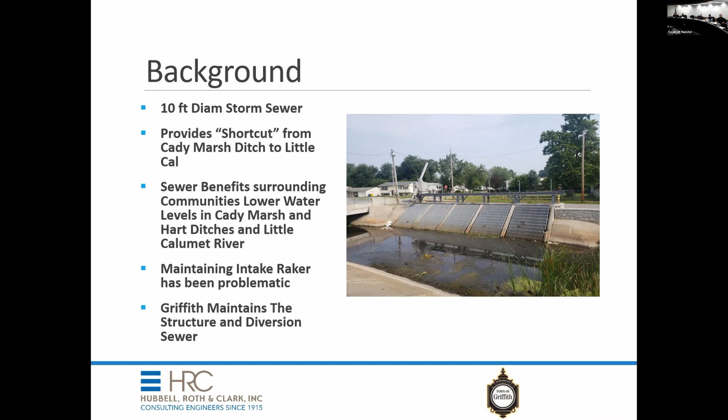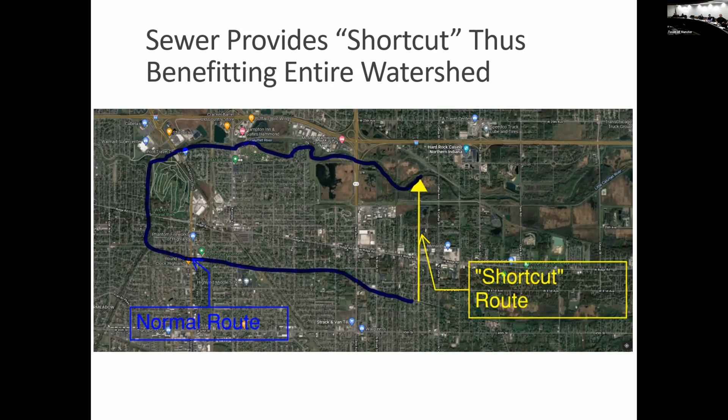The chronology of the problems the town has had: in 2010, the sewer and intake were installed, and then about a year later, the Corps installed this mechanical traveling rake, which you see there — that long thing with the boom.

In 2012 and 2014, the town had problems with this. There's a variety of issues why this thing did not work properly that I found out in the course of doing this study. Long story short, it doesn't work. They've had numerous problems with it. Since about 2014, the town has basically given up on trying to keep this thing operational, and went back to manual raking with a backhoe parked on the street behind this trash rack. Needless to say, that plastic or fiberglass rack originally installed didn't last very long with that kind of activity.

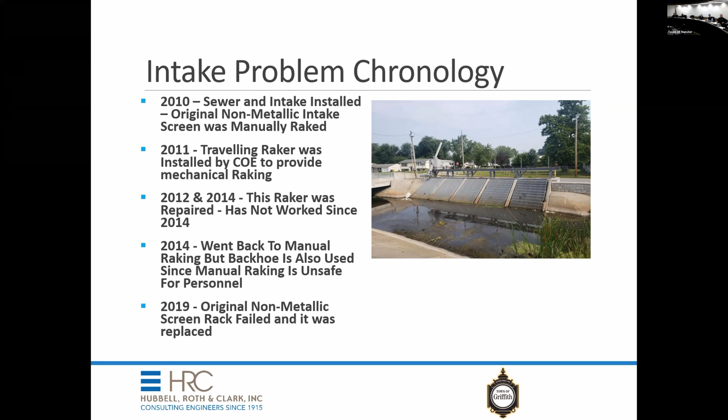The original rack was replaced with a very robust metal galvanized steel rack, and it's still in place. It's still very robust and can withstand a lot of shock. It's very well engineered, well designed for its purpose.

But with the manual raking, as Andy alluded to earlier, there's high velocity currents into the sewer because this is built right at a weir. There's about a 10-foot drop behind the weir, so water rushes through there. In the past, some of the guys have had to actually stand in front of the rake to pull large objects away from the front of the rack during rainstorms. It becomes very tricky, and it's a safety issue.

I don't have a picture of it, but guys, when the water's to the top of the bridge and it's 5 feet plus deep in a current, guys were in waders trying to get things out of there, getting pushed, and it was just so unsafe. I had to stop the practice the minute I saw it. Then we're back to trying to do this, and the guy hurt his rotator cuff, and they're trying ropes and buckets and rakes. I got a couple pictures, but unfortunately I don't have a bunch of them. So it's just an extreme problem, and it's just not safe.

And we know it's valuable. It's a great thing that was done to create that waterway to help the flooding, but we've got to be able to keep it clear. The rake just never worked. It was rebuilt 3 different times, sent back to the manufacturer. It just doesn't work. That's one of the options you would have seen that we presented - we could try to fix it again. There's just not a lot of confidence, although it's the lowest cost, that it will continue to work.

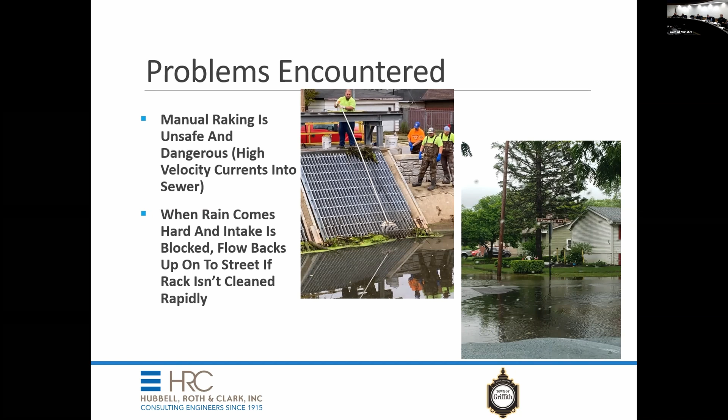And with the solution that you've got, go ahead and go into that. Needless to say, when they can't rake it fast enough, it backs up on the street, as you can see from that last picture, very rapidly, and it's starting to flood the streets.

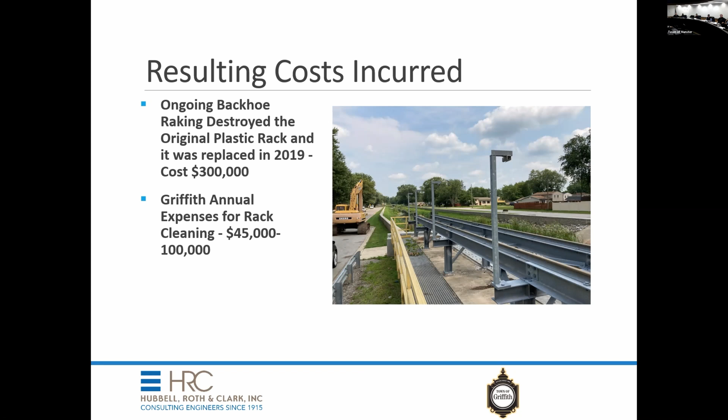This is just some of the costs that have been incurred because of the inadequate original design. The rack was replaced at a cost of about $300,000 in 2019 thereabouts. And then the town has been incurring additional costs because of having this backhoe available on demand to continue to rake clean the rack during storms. For a while, it was actually parked out there, but it's actually usually trucked in when needed. So that's what the costs being incurred are.

Just out of curiosity, who designed this again? This was the Army Corps. Oh, thank you.

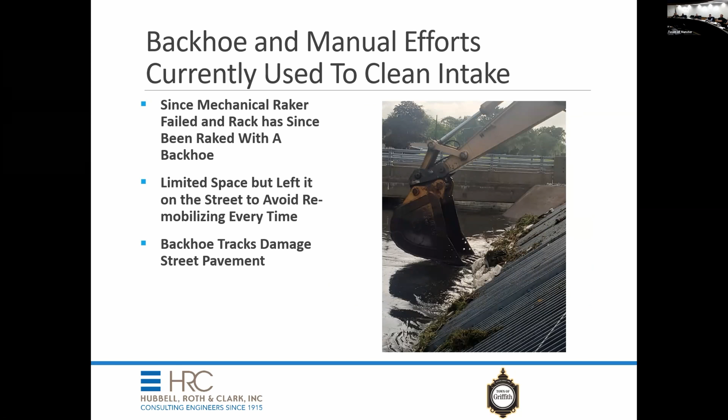So we did a study, and we looked at 3 different alternatives. In the course of looking at that mechanical rake, we found out that the original design - and I talked to the manufacturer of this rake, and they had a lot of problems. Part of the problem with the original design engineer is that the rack was designed at a different angle than what their boom operates at. So as you rake this thing up the slope, the boom angle had to continually change. That turned out to be a radically different departure from what they normally do - they normally design the boom to work on the same plane so it doesn't have to change its angle as it rakes up the slope.

But there's two problems with selecting that alternative. One is you still only have one machine to clean 5 racks. So if the one machine goes down during a storm, you're still stuck with the same situation you are today.

You have no redundancy. Both of those other 2 alternatives that we looked at put an independent machine on each rack, so we've got 5 times the redundancy, or 4 times if the first one goes out. But basically, we looked at 2 different alternatives.

Okay, Mr. Whitaker. Just very briefly, back to your slide on, let's see.

Okay, and then on the proposal, when we asked them to revisit and give us a cost to fix and update it today, they claimed they were giving us a great price to try to make it right from when it was wrong back then. But we haven't gotten any compensation. We had to pay to ship it to them back in 2012 and then bring it back.

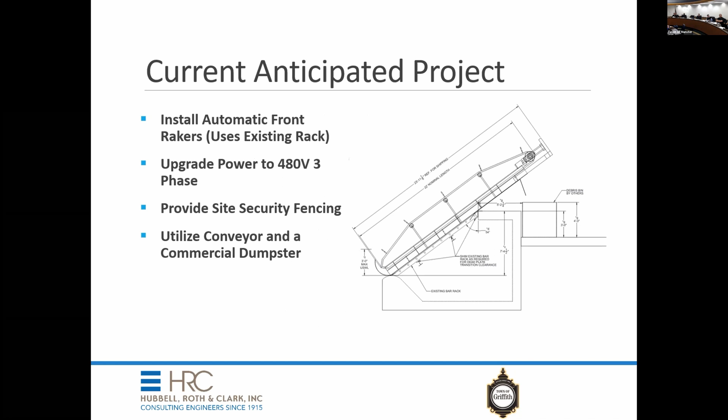Okay, maybe it's on the next page. Yeah, this is the recommended alternative. So the existing one is 57.1, I believe, that was in the packet, and I think you're proposing like a 30-degree angle. For it to rake from east to west, your angle is going to change from 57 down to 30 in order to accommodate not being caught up. Well, the existing angle is pretty much what it is there on the far right today.

We've got to change it slightly, maybe 1 or 2 degrees, just because there are some obstacles at the very top, so it can rake cleanly up, go onto a plate, and then drop onto something. So we have to do a slight change. As you can see, that's probably the least change of all 3. The other 2 have to be much steeper to work, and that translates into additional cost to move all that heavy structural steel around.

The last question I have for now is, you said a lot of dam projects use that type of design. Anything locally that we might be able to envision seeing that's comparable? I don't know, I'd have to quiz the manufacturer on that. Most of the dam projects they've done are down in the New Orleans area, big dams, and out west. I can find out. Actually, this type of machine on the far right is also used in wastewater treatment plants a lot too, for the same purpose, raking stormwater screens and sanitary screens, and there's one that was just recently put in that I worked on over at the Hammond Sanitary District.

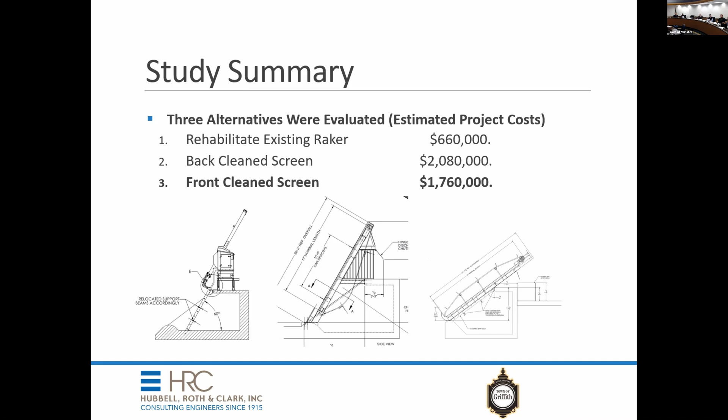That's the return chain, if you will. The one that goes up the slope is the one that actually engages with the rack and pulls the material up the slope and drops it down behind the rack. So those are actually polyethylene rakes, I believe. One's polyethylene, and every so often they put a stainless steel one in just to make sure they get a good scrape on the rack. What happens with these things is the polyethylene sort of works into the steel and wears a little bit over time, but it's a fairly hard plastic material.

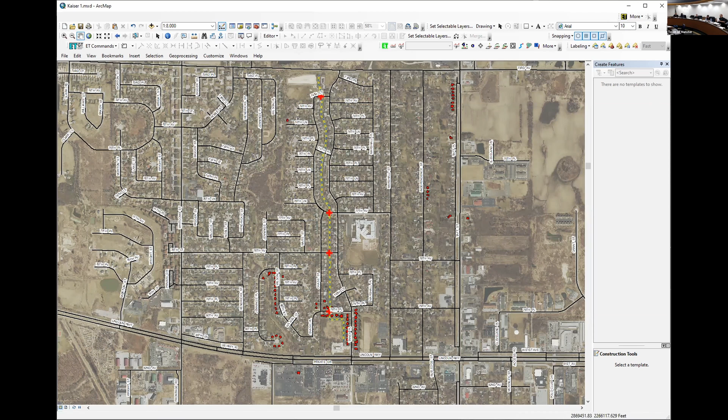Yes, let me see if I can stop sharing this. Mr. Lake, are those culverts a part of your ongoing maintenance throughout the system? Yes, they are. It's not a regulated drain, so it is our responsibility to maintain those culverts. As you can imagine, over the years, with the street departments before the utility existed, they modified things and didn't help matters much. So we're trying to put things back to a situation where it's hydraulically functional for that particular area.

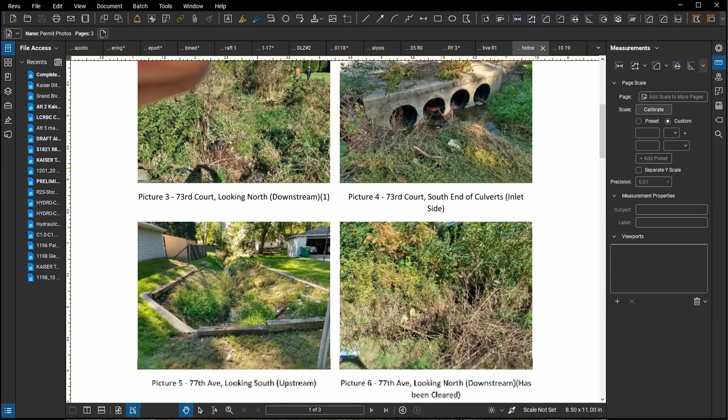All right, are we on the screen again? Yeah, I'll see that I get it. This is the 73rd culvert. So you have 4 culverts that will be replaced, and they're small. They're going to be replaced with 3x5 boxes, 3 foot by 5. And then we continue on. This is 77th Avenue, and this is 77th up here.

In the meantime, actually in this picture back up here at 73rd, you see the town was doing some maintenance on the ditch at the time I took these pictures. And continuing on, this is 77th, the single culvert.

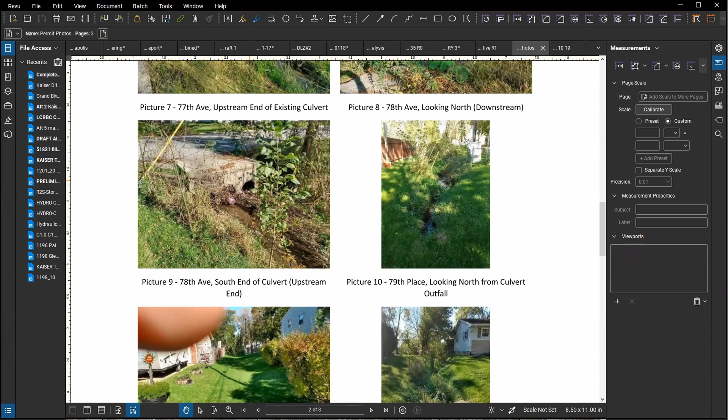This will be replaced with 2, 3x5 boxes. And continuing on, this is 78th. Again, it'll be the 2, 3x5 boxes or so, I believe, in that one.

And the trickier one was up here at 79th Place. This is a very small pipe. It doesn't show well in here, but it's enclosed through here. The original master plan proposed opening it up, but you can see the proximity of the residences. And after discussions, the town said let's keep it enclosed.

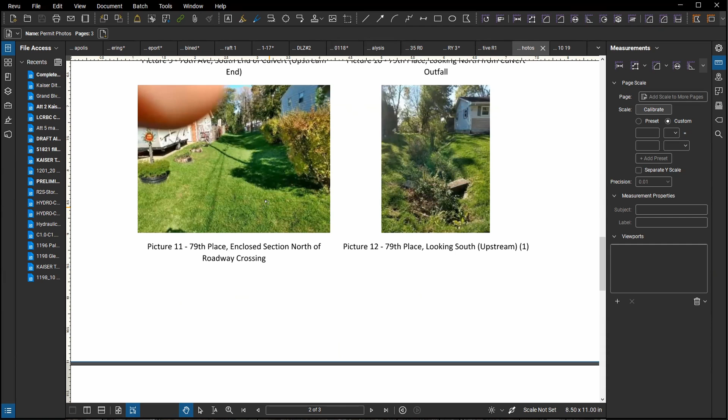And so we had some trouble. Instead of the original proposed inlet, we had to go to a 4x4 or 3x4 boxes here in order to keep the clearance on the roadway, as it goes under there and still make the inlets.

Does that answer your question? Do you have easements for all of this? Yes, there are easements currently platted.

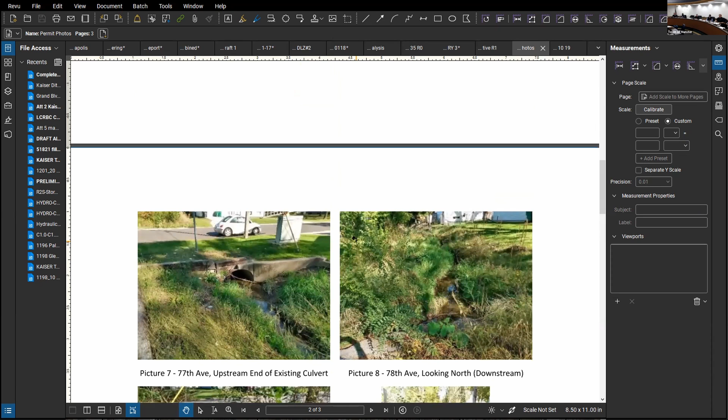Thank you. Gentlemen, questions? Yeah, I have Mr. Ware. So on page 3 of 4 in your application, your comments on the response section, I believe the 3rd line down, detention to be part of future project. And then a little bit farther down, it kind of goes hand in hand per the master plan, 30 residents impacted by reducing peak flood elevations. And again, it calls out future detention.

Do the new culverts not fix the problem now, or is it mandatory that you have to have detention later on down the road to fix this?

The future detention will complement this. This will resolve the issues described in the application, including any overtopping of these roadways, which is another public safety matter. The future detention that we have on our master plan is going to be south of 30.

Which is probably part of a future larger master plan. Correct. Nothing else. Sure.

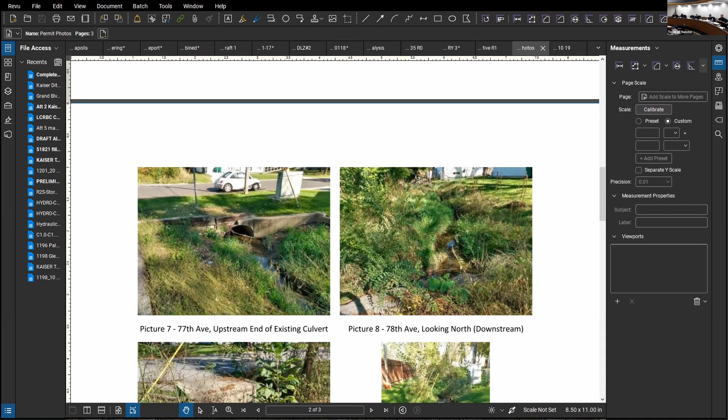Any other questions for these fine folks? Outstanding. We're very appreciative of all the help, and we understand this is a long-range plan, and thank you for taking the time and answering our questions. Thank you.

All right, next up, Mr. Repay, oh, they're gonna, is that also the Hickory Ridge apartment or is that a different one? That's gonna be different, I think. It's a different one. You're gonna throw that to someone else, I believe. Yeah, I don't know if I could share screen here again. Let me see here.

Matt, this is Thomas. I got a presentation if you want. Okay, good. Okay.

Well, this is Matt Lake again. Let me just introduce you. We got with us today Thomas Burke from Christopher Burke Engineering. This is our Hickory Ridge Lake Apartments Flood Control Improvements Project. The project is located east of Cleveland, north of 57th Avenue.

We've done some preliminary work that Thomas will probably talk about with hydraulic modeling, topographic survey. And the one thing we're waiting on before we move towards full engineering was going to be getting an easement signed and recorded. And we received that just recently, so we felt comfortable moving forward with the submittal to you guys.

We're looking at design, engineering, and permitting. Again, we're looking at 50% of the design and permitting costs. The cost total is $162,000. We're asking for $81,000. Overall, this project we anticipate will be about $2.3 million. And again, I'm going to be using American Rescue Plan money that we received from the town as part of our cost share for this.

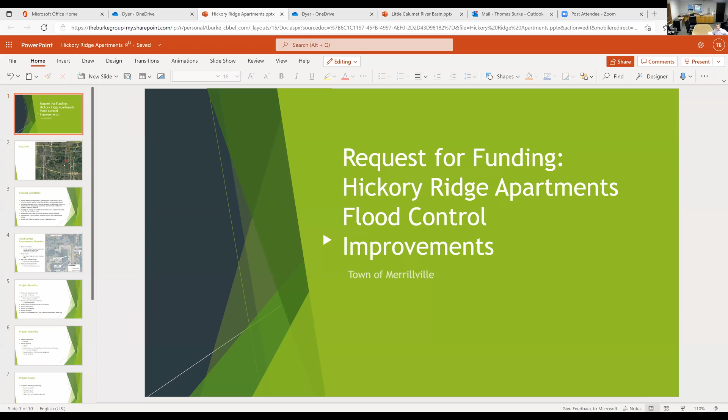And with that, I'll let Thomas take it away. All right, thanks, Matt. Share my screen. Mr. Burke, please do the introduction thing for the whole record, please.

Thomas Burke with Christopher Burke Engineering, working with the town of Merrillville on these Hickory Ridge apartment flood control improvements. Thank you. Welcome.

Just to give you an idea where it's at in Merrillville, US 30 in the bottom, I-65 over on the right. This is right off of Cleveland, kind of in the center area there.

As far as what's going on right now, there's 12 apartment buildings that have multiple units that have flooded multiple times during heavy rain events. The flood area that comes from the northwest covers over 200 acres. There's also Meadowdale Lateral immediately to the east of this Hickory Ridge apartment building that can cause water to back up into this area.

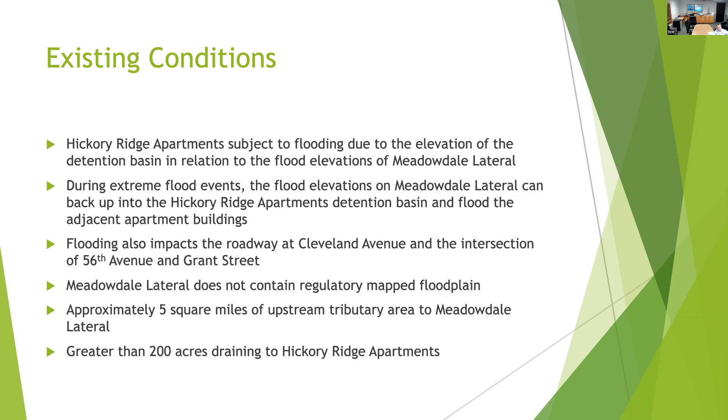It has a detention pond built a long time ago that doesn't meet today's requirements. We also have an area on Cleveland Avenue at 56th and Grant that will flood. Meadowdale Lateral itself does not have mapped floodplain, but it has 5 square miles of drainage coming through there.

This is a close-up picture of the Hickory Ridge apartment complex. The blue arrows on top show the offsite area coming towards Hickory Ridge, trying to flow around it, but what happens today is it flows through it. Just to the right of the screen is Meadowdale Lateral.

This shows the proposed improvements. In red here is a flood control berm that's meant to protect, tying to higher ground and protecting these 12 apartment buildings from flooding that could occur either from the offsite area coming from the west, as well as the connection to Meadowdale Lateral to the east that can back up and flow there.

We're proposing a pump station shown here in green. We're also proposing a backflow preventer, as well as detention, over 8 acre-feet of detention that's meant to slow down the water so that we're not exacerbating problems on Meadowdale Lateral. We've done some initial modeling and calculations to get to this point, but that is the overall project.

Along with helping with the flooding on Cleveland, we're improving conveyance across under Cleveland into this detention pond. It also helps with localized flooding over here. So those are the main components of the project we're looking at designing. It's conceptual right now.

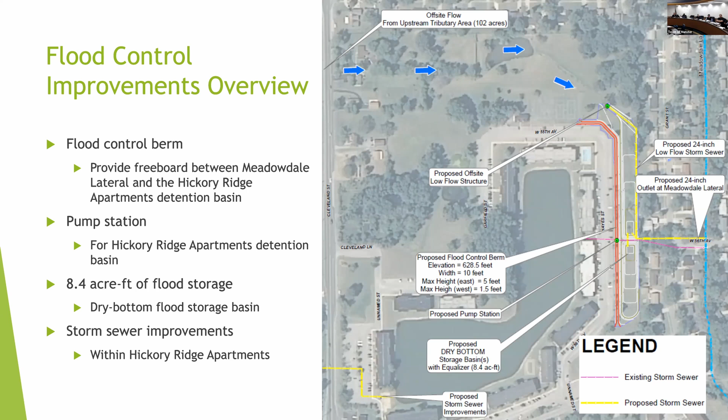And the value you have assigned for design engineering and construction engineering is strictly for that 2.3 portion of the work, not this portion of the work. I'm confused by your - Correct. 15% or so, 18% from permitting and engineering on your budget. Is that...

380,000 inclusive of this 162 or in addition to? So the 162 is just to take this from concept through design and permitting. Okay, I see, your question is because you have permitting here as far as the 2.3. Yes. Yes, sir. So you're correct that there is some overlap when we include design engineering and permitting as part of that 2.3, but what's overriding anything is 25% contingency because it's conceptual design right now. So you are correct that there is some redundancy between the 162 and these two numbers.

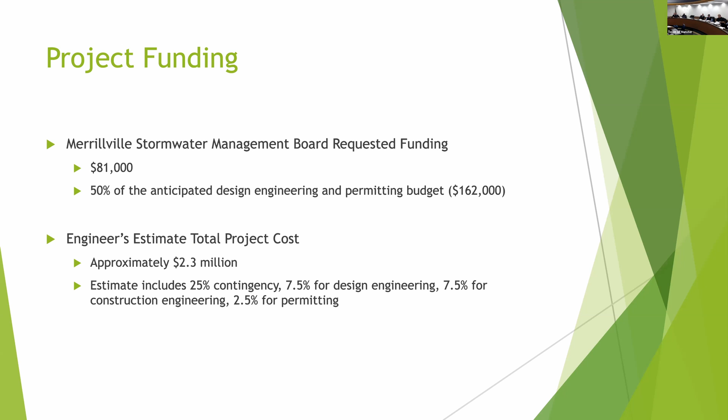Okay. And then one more favor, and this isn't really related to this application, but would you be able to provide us a breakout of those four major cost components? The control berm being one, the pump station being another, the storage basin being the third, and then the Hickory Ridge storm sewer improvements being the fourth. Certainly. Thank you.

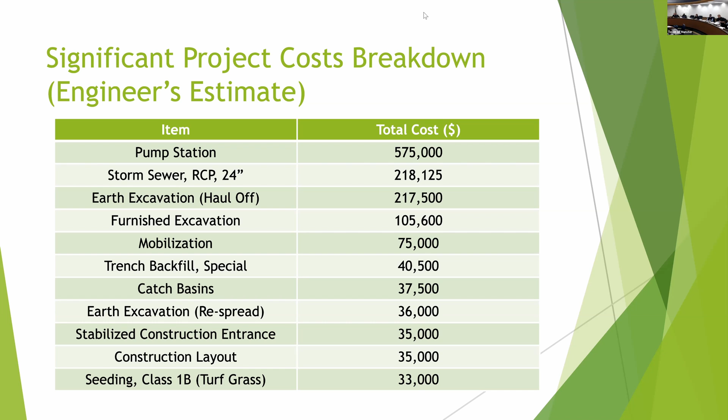Any other questions? Thank you very much, gentlemen. Thank you. All right, the last application is going to be the town of Dyer with Hart Ditch Stream Bank Stabilization. Thomas, are you going to be doing that or is someone from the town of Dyer? Oh, there I see Brian. Brian's here. Yeah, I'm going to be doing that one. If I can share again. One second.

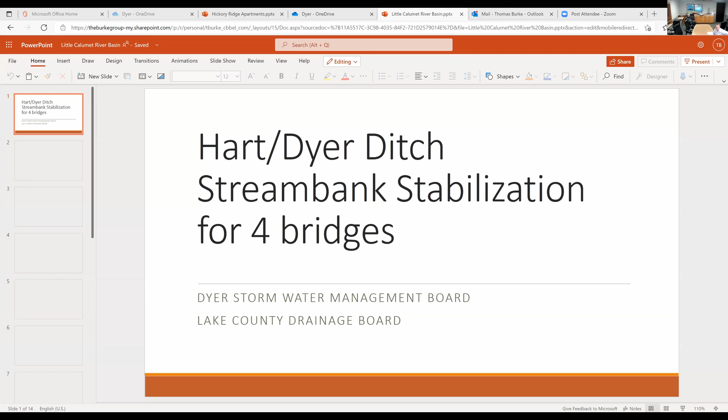This project deals with Hart Ditch and Dyer Ditch.

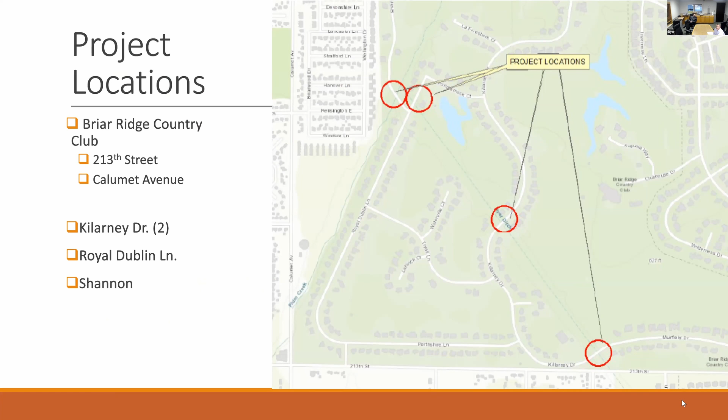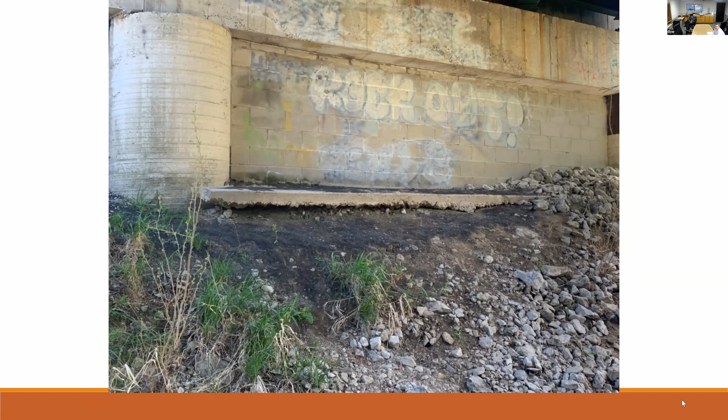Here's another one where we have nearly vertical banks underneath the bridge, but this isn't uncommon for lots of areas along Hart Ditch, as you're well aware. Here's just another view of the very steep eroded banks, the sandy soils that we're encountering.

It's jumping on me, sorry. So, just another one.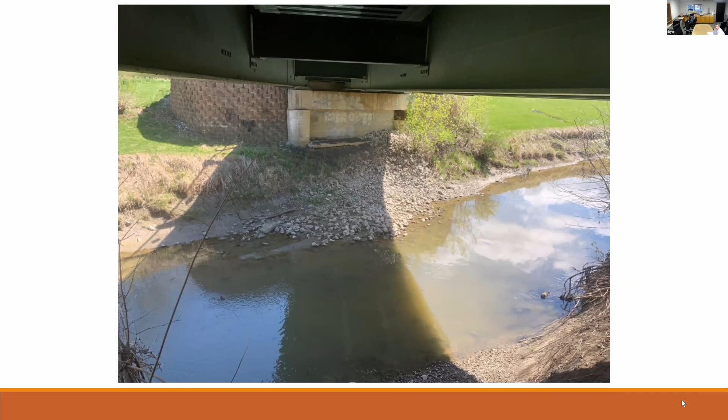So when we are doing this project, we're looking not just underneath the bridge, but tying in the Hart Ditch upstream and downstream to where we have some stabilized banks. So the project benefit is the stabilization that's being done, as well as the reduction in downstream erosion. We know that Hart Ditch is carrying a lot of sediment downstream to Little Cal. The more we can stop that sediment, the better off we're going to be, which will also improve water quality.

Shannon Bridge is probably one of the worst case ones where instead of just placing larger riprap to protect it, we're going to actually use this thing called Scourlok, which should be a more green way of addressing some of the erosion that's going on there. It allows a one-to-one slope, and also can help deal with high energy flows, which we're encountering in this location.

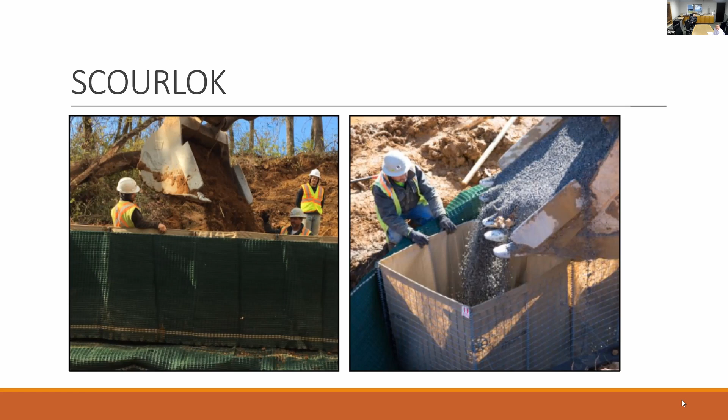Just to give you an idea, they come out here, they fill it either with stone or dirt, and they basically set these up on site. They're relatively easy to install. They tie back into the bank, which isn't shown here, but they're tied back into it. Eventually, vegetation can grow through there, and this will be what it'll look like at Shannon, where there's going to be 2 sets of these Scourlok installed.

The request is for $81,000, which is about 1/3 of the total cost. The estimated cost of the project is $245,000, which includes a 15% contingency. The request is for 1/3, as I mentioned. Briar Ridge Property Owners Association will be paying 1/3, and the Lake County Drainage Board, because it's a regulated drain, has agreed to pay 1/3 of the cost, as well as do the bidding for the project and oversee the contractor. The long-term maintenance needs will be the responsibility of the surveyor's office, since they're both regulated drains.

Just an idea of what the costs are, most of them are going with riprap, so there's quite a bit of riprap. There's the Scourlok that's being used, maintenance of traffic over the bridges, clearing and grubbing, etc. So, any questions?

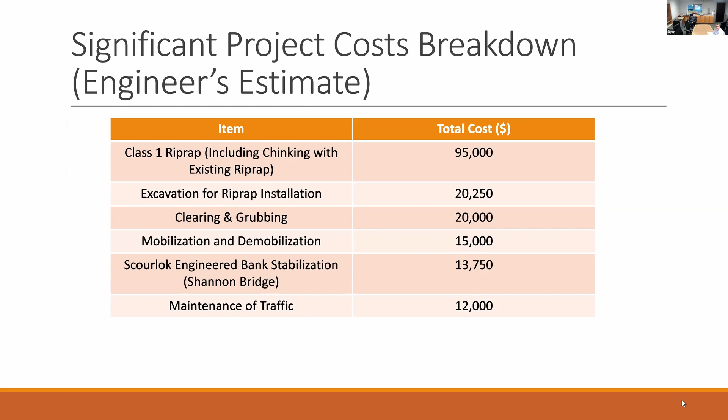All right, back to the board for questions. Gentlemen? Yes, this is Tom Gazdecki. If you received funding, how soon would they start?

We haven't gone out for bid yet, so we'd have to go out for bid, which would take probably a month of advertisement, another month to award it, so probably a couple months out. We'd also submit to DNR what the project is, and I don't know that they're going to issue a project permit within a couple months, so probably it's this summer.

Okay, thank you. I have a question on the Scourlok. You mentioned that vegetation comes through that, and at a lot of locations where we're doing maintenance, we're afraid of vegetation coming through the system. Is that something you're wanting? I'm wanting it from a water quality standpoint—if you had some vegetation, it certainly has more benefit than just having some of the riprap that it flushes against.

Yeah, I understand, but vegetation is great, but sometimes it's phragmites, and that's not a good thing. So I'm just trying to get an understanding if you're going to try to grow things there, or is it for aesthetics? Well, I'm not suggesting we're intentionally growing anything there. I'm just saying you could have grasses growing out of it. That's not the intention here.

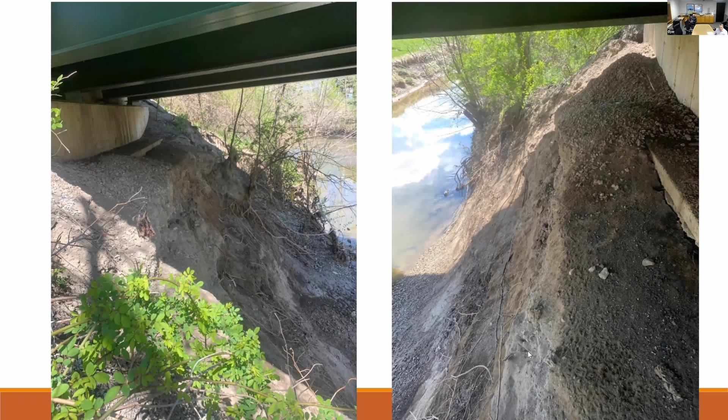And then, I don't want to basically, it's kind of sort of a, I wouldn't say biodegradable, but a greenish basket that you're filling with dirt or rocks or something. Correct. So structurally, I would think, I don't know, is it topped with some sort of light concrete or cementitious material, or it seems like the structural integrity is all tied into the tieback. So I wanted to see how it tied back into the earth.

You're correct, there's two things with it. It's tied back here, as well as the foundation, same thing we use for the gabion baskets. We still put a stone base to it so that this will stop the overturning, but we've also seen it just pushed out. So there's two components to that we've looked at to make sure it's not going to move.

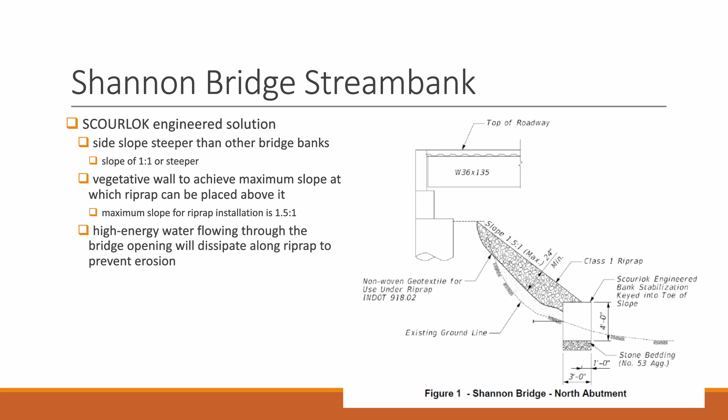So what is that, just like a T-bar or something like that? And how does it grab onto that mesh basket? So on the mesh basket, yeah, that piece right there, it's much wider than any of the openings that you can see here. I'm just going to go back to the picture of it. It's much wider than any of the openings that you can see here. So it holds on to, I don't know if it's a foot around, two foot around, but then it has to be anchored into solid ground behind it.

And I'm sure there's a specification for how far it has to be tied back in, like 4 or 5 feet long or something. Correct, it's longer than that, but yes, correct. Okay, and what is it made of? Is it metal? Yes, it's steel with a clamp on the back of it, so that you push it into the point specified by the specifications, and then you turn it, it opens up and grabs it. Oh, just like a wall anchor. Correct.

One other last question, you mentioned something about it improves water quality too. Do we have an issue with water quality here, or is that just an added benefit? Added benefit. Thank you, certainly.

Thanks, Mr. Chairman. Any other questions, Mr. Wisniewski, you good? Yeah, I got one.

What's the reasoning behind this rather than like a poured concrete apron under the bridges? Trying to anticipate and satisfy DNR requirements. Would they have an issue with a poured concrete apron versus what you're trying to do here? They have an issue with the hard armoring that we know works well and has stood up in time. They've certainly come out clear that they have an issue with the way, that they would like to see something softer, greener than what we've been using.

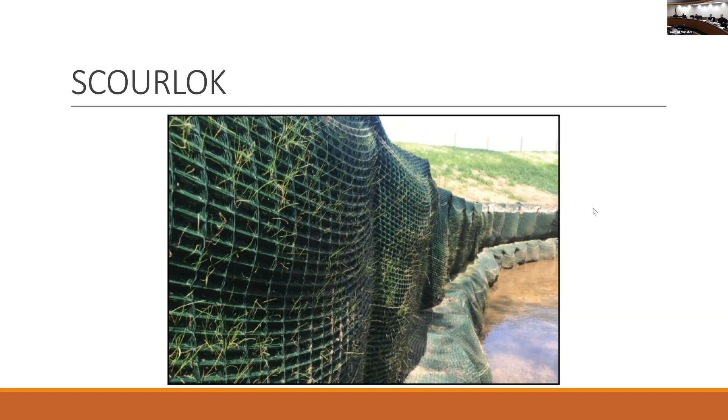Mr. Chairman, I'd like to make a motion to approve Amendment 2 of the United States Geological Survey Standard Joint Funding Agreement pending legal review. There's a motion, is there a second? Second. Mr. Repay: over the years, the USGS has become really interested in the natural spring. This amendment allows them to monitor it, tell the age, and check the aquifer and the sources. This is no cost to us, it's federal dollars we have no match to, and it's just an amendment to our normal gauge station agreement. Our attorney has looked at it, reviewed it, and has no issues.